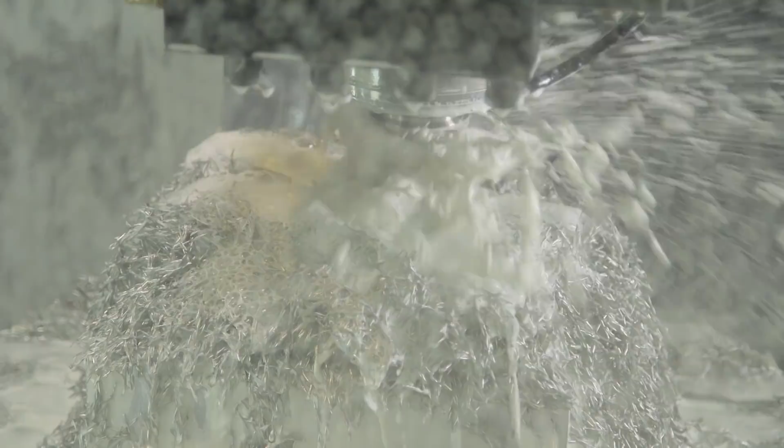Build my own company just like how Titan has. Teeth are cutting into the vertebrae. One mistake.

Our country was built on a foundation of American manufacturing.

I pledge allegiance to the flag of the United States of America. But today, we've seen millions of jobs lost, and 100,000 manufacturing plants have been closed. And to the republic for which it stands. Join us as we take a stand for American manufacturing and fight to bring those jobs back home. One nation, one nation, one nation. Under God, under God, under God, indivisible, with liberty and justice for all.

This industry is hidden from the general public, locked behind closed doors. Today, all of that changes.

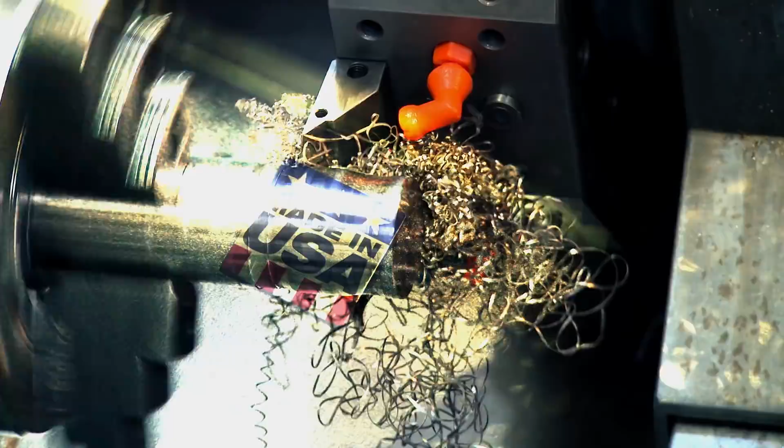Every week on Titan, we're going to show you great American companies that are manufacturing and doing it big right here in America. We're going to teach advanced manufacturing techniques, and we're going to clearly show you how to bring work back to our shores. It's time to put Americans back to work.

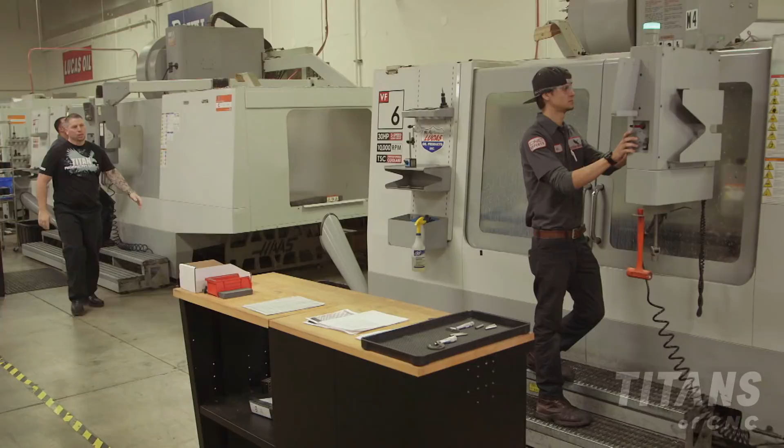All right, have a good weekend, huh? You too, buddy. All right, yeah. Stuart, have a good weekend, huh? Yeah, all right, take care.

What's up, guys? So, how's it going? So you're on the lathes now? Yeah, I do everything, dude—mills, lathes, make it happen. What about him, stepping up? A little confident, a little cocky, but he's doing good. Keep it up, man. Have a good weekend, huh? Yeah, you too, okay.

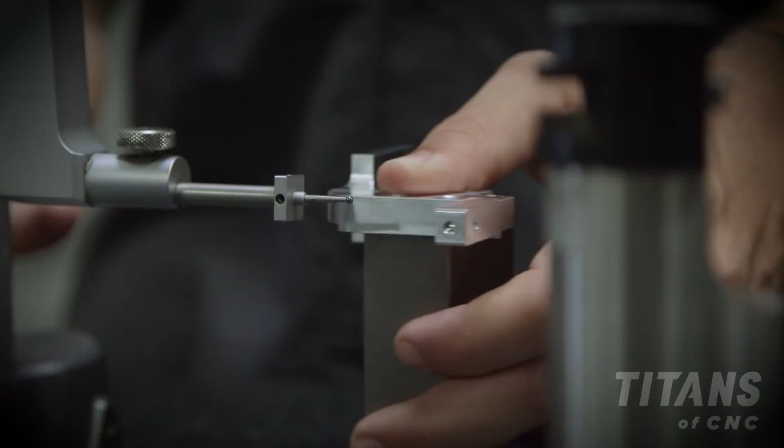As a father, I love just seeing my kids working, like it's a family business. I look around this shop and I'm just like, we got all these machines, look at this big building. But without family, it doesn't mean anything.

When I first went to prison, my son Chris was just born, Tyson was 3 years old. I'd ruined everything and there was no hope. I had 16 years in prison, and I was like, I'm never gonna see my kids again, ever.

I grew up in Maui, Hawaii—it was me, my brother, and my mom. It was pretty hard, you know, I didn't really see my dad too much. He was in prison right when I was born. We would talk on the phone here and there and see him sometimes, but it's hard growing up without your father. I tried to do something that would bring money into my family so I could take care of my kids, so I could bring them to live with me.

Walked into a machine shop, got a job for $9 an hour. Everybody knows the story, I worked my way up. I moved in when I was 16, and it was pretty hard, because I had my own habits and stuff, and 16 years of not having that is going to create conflicts and struggles. Me and Chris, we're like the same person—I look at him, it's almost like looking at a mirror, you know, when I was younger.

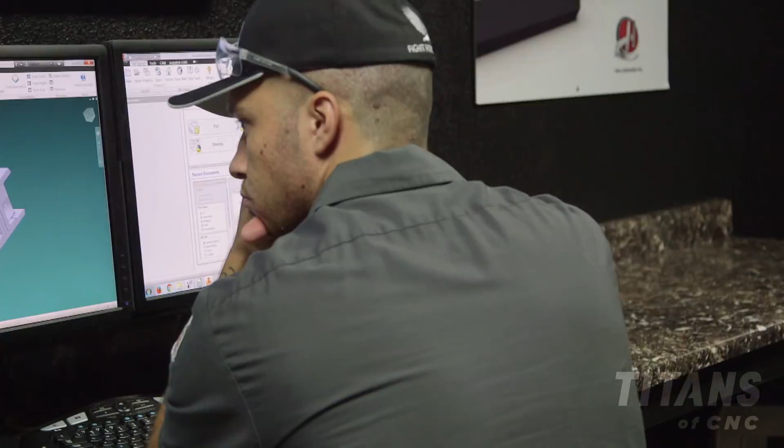Hey, what's up, Chris? How are you? I thought you went home, man. Nah, I just stayed here doing the work. So you're off the clock, just doing it on your own? Yeah, just trying to perfect it, get good at it. I'm really proud of you, ever since you came back you've just been doing so good, man. It's great having you.

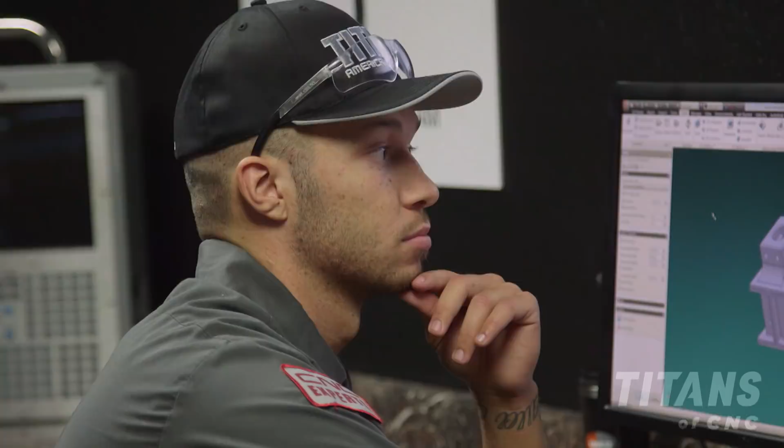Yeah, hanging out, barbecuing away from work, and then just seeing what you're doing. I want some titanium jobs, some Inconel, anything crazy like that. I want that. You're ready, you know? Yeah, I'm confident. Cool, ready to do it. Opportunity's coming. Yeah, let's do it.

Well, I'm getting ready to take off. You want to go grab a bite? Yeah, for sure, I'm done. I'll just close this up and I'll head out. Okay, cool, I'll meet you out there. All right, cool, yeah.

Programming has become like this kind of bond between us now, and we talk about it all the time. I'll be at his house, we'll be talking about speeds and feeds and improving stuff and taking it to the next level. It's just this thing we're both real passionate about, so it's cool we have it in common and can talk about it anytime now.

Awesome, everything's turned off? Yeah, everything's good. Cool. You know I'm mastering this HSM Autodesk software, right? You're getting pretty good, man. It's time for a raise, dude. Not that good, I think I got to teach you a few more things.

Next on Titan: a big chunk of titanium, running over 100 inches a minute. Built my own company, just like how Titan has.

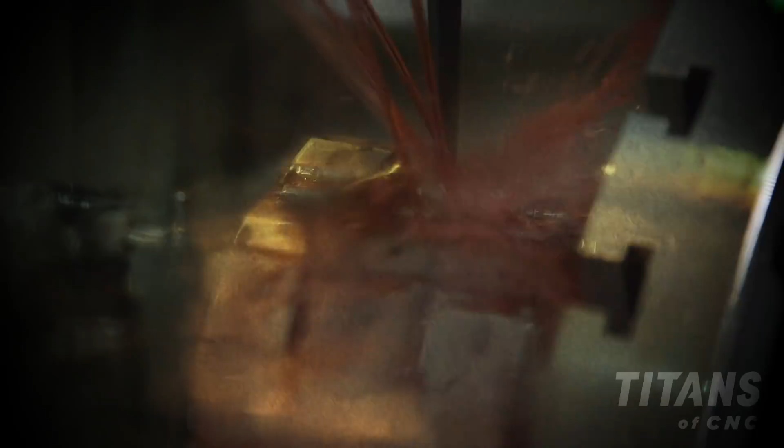So you guys are making parts that go inside the human body, hooking our bones together, and then you're also making parts that are going into space, right there in Pennsylvania?

Yeah, it'll be great to have you. We have everything lined up for you, ready to show you what MK Precision can do.

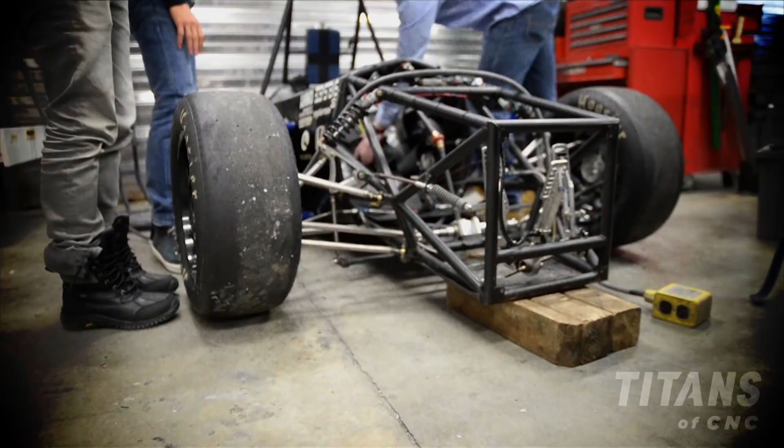I know it's only a week away, but we have a special project for you. I have a collaboration going with Villanova University, and the students are building an SAE race car to compete against well over 100 teams all over the world. It's a titanium upright, all four corners of the car, and it ties all the suspension together. It's a critical component, and that's why they picked us to make the parts. But I know you can knock them out just like I can, I just don't have the time.

All right, so go ahead and send the solid model over to Zach. We'll check it out and get right back to you. In a week, I'm coming to Pennsylvania, MK Precision. It's gonna be awesome. All right man, we're excited to have you. All right man, I'll see you later. Say hi to your brother. Will do. Good to see you, Zach. Yeah, good to meet you.

I just got off a video conference call with Mike from MK Precision, and he didn't throw a wrench into my work week, he drove a car right through it. He came with a challenge to build a titanium suspension upright for the young engineers at Villanova University. He knew I was coming out, and now he wants me to bring this part.

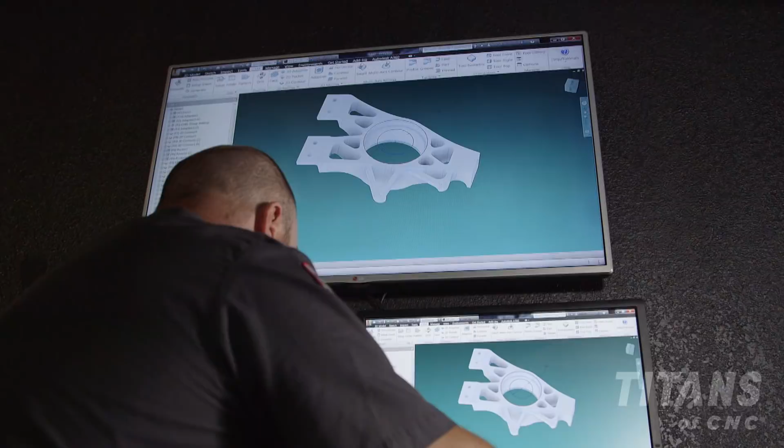I went in and talked to my team, talked to Dana, and of course he was giving me some attitude, but I gave him an attitude adjustment and solved that problem. I gave him my son Chris, I gave him Stuart, took him off the machine, told him to get on the software to start programming the job. I ordered the material from TMS Titanium, it's getting here first thing in the morning. We're all set to go. My other guys have come in line to take care of my other customers, and we're rolling.

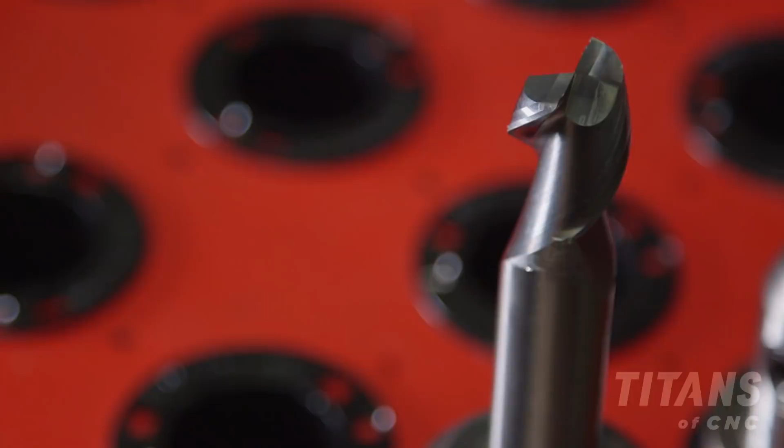Right now, Dana has me doing a setup on the 5-axis. Currently I'm grabbing tools for him. You might not think selecting tools is that big of a deal, but the slightest variance or a small chip in the tool can be the difference between succeeding and failing. There's a million different tools, and as a machinist you have to master all of them. Just looking at the IMCO end mills, you have 2 flute, 3, 4, 5, 6, 7, 9, 13 flute - those are the different cutting surfaces, and each design has a different purpose. Then you've got to look at what the end mills are made of, the different coatings, the different lengths. When cutting titanium and Inconel, you have to master it all to be efficient.

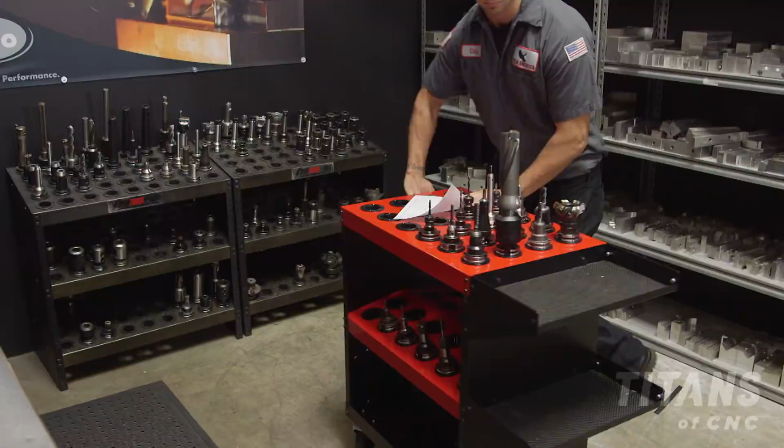Just got done programming this big chunk of titanium for MK Precision using Autodesk Inventor HSM. It's an upright for a little race car for these college kids. Gonna start out with facing this thing - this is a big chunk of titanium. It's gonna be a lot of roughing using IMCO end mills, running over 100 inches a minute. They're gonna be tearing it up.

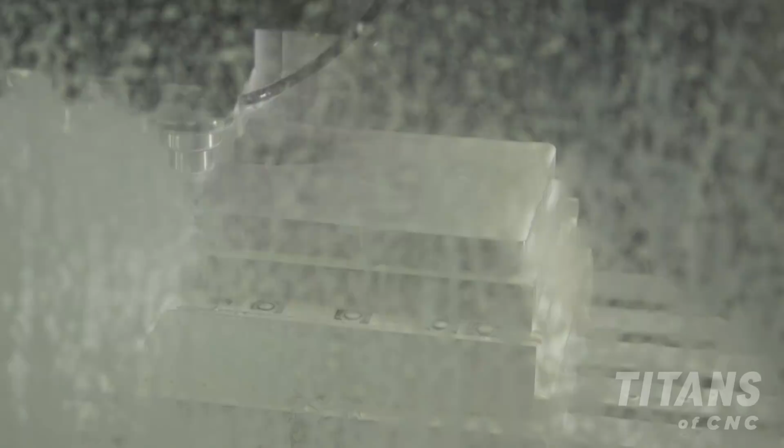Right now I'm finishing the body of the part, getting rid of all the material around it. I'm running heavy coolant on this - titanium can ignite, and at the speeds and feeds I'm running, I can't take any chances trying to run dry for the show or anything. So I'm gonna be blasting coolant on those tools, making sure they last. If I were using Cobalt standard drills, I'd be pecking, taking a chance of breaking drills and putting the entire process in jeopardy. There's a center bore that's got to be held real tight for the fixture on the second side that Titan designed.

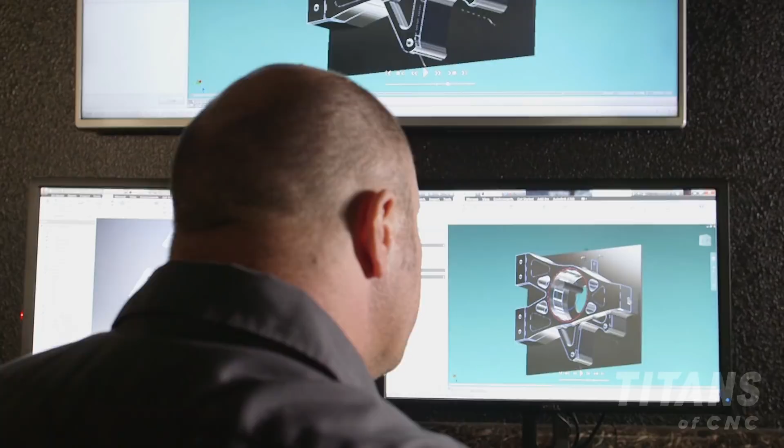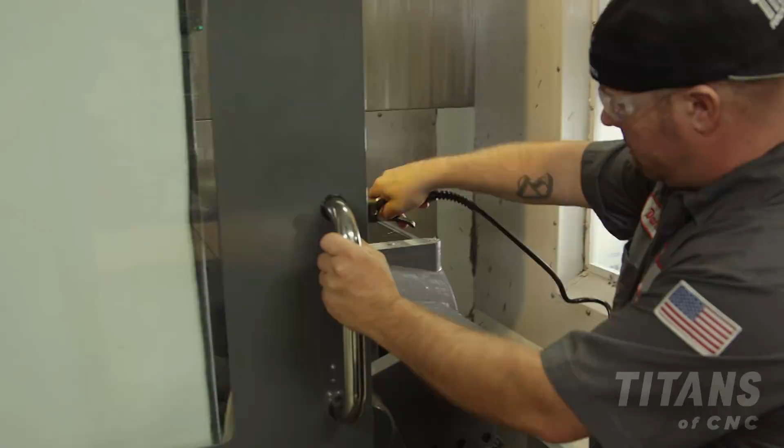There's also some pockets on the part. Because of how deep they are, you've got to use smaller end mills. When doing a part like this, you've got to have a good strategy. Our strategy is to go nice and deep, take a lighter cut radially, and just jam through it. These are the type of strategies you need to implement to be able to compete in manufacturing. There's a lot of shops out there that aren't using the latest technology - this op would be taking all day for them. This is what you have to do to be competitive in America.

What's up, Sean? Hey, Dana. Got the suspension upright for MK Precision.

It's a cool part. A lot of the dimensions aren't on the print, so I want to make you a print off the CAD model, and then you can check this out. All right, I'll meet you there in a couple minutes.

Dana just brought me this part, which I know next to nothing about, except that it's a huge chunk of titanium, and it's gonna end up on a race car.

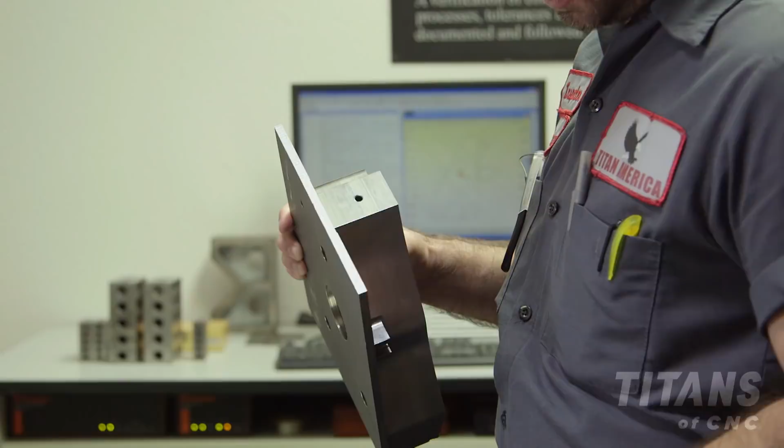It seems like a moderately complex part, but to make things more interesting, I received a minimum dimension drawing. So I ran to the programming room and got some supplemental data off of the CAD model, which I'm now using to form my cogent and very comprehensive dimensional analysis.

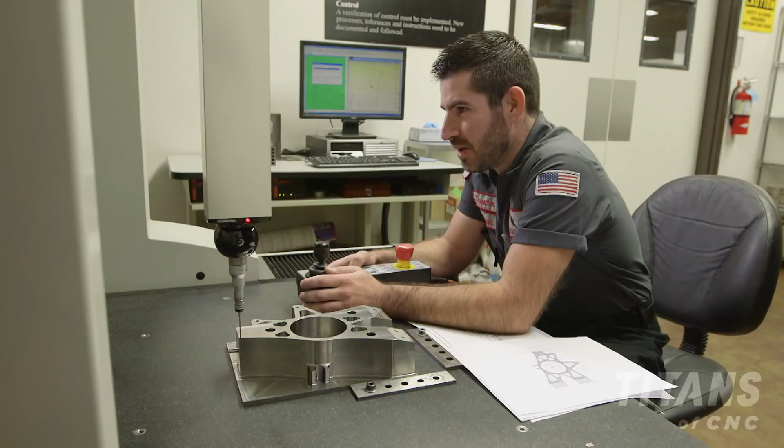It's pretty simple stuff, really. All I have to do is check lengths, widths, heights, hole sizes, locations, depths, profile, perpendicularity, roundness, flatness, internal and external radii, and all my edge breaks.

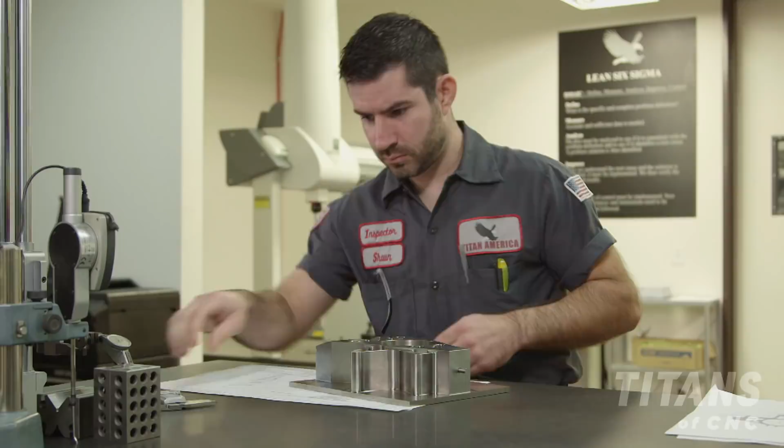Once I'm confident that all of the physical elements are in their proper places, I'll take the part over and run some gauge pins through the holes to double check the size. I'll perform a visual examination looking for dings, dents, scratches, bad blends, and unwanted tool marks.

Once I'm satisfied, I'll take the part back out to Dana and give him the green light to go ahead with production.

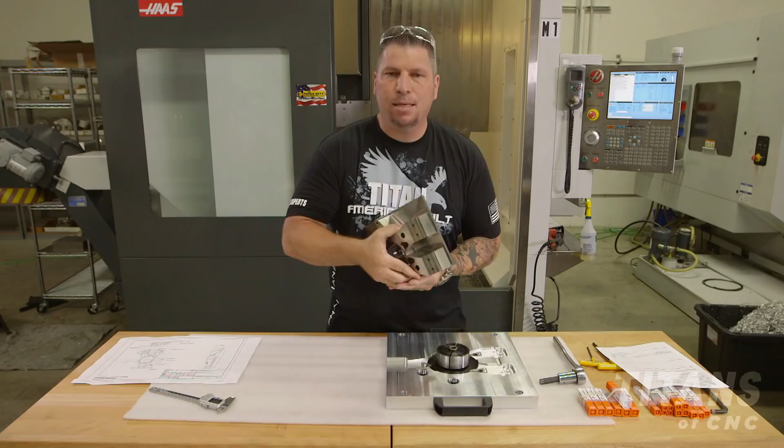So the first operation on this titanium suspension upright is complete. Dana did a great job removing all the material. The surface finishes are absolutely beautiful. And now we gotta flip it over and 3D contour surface the entire part.

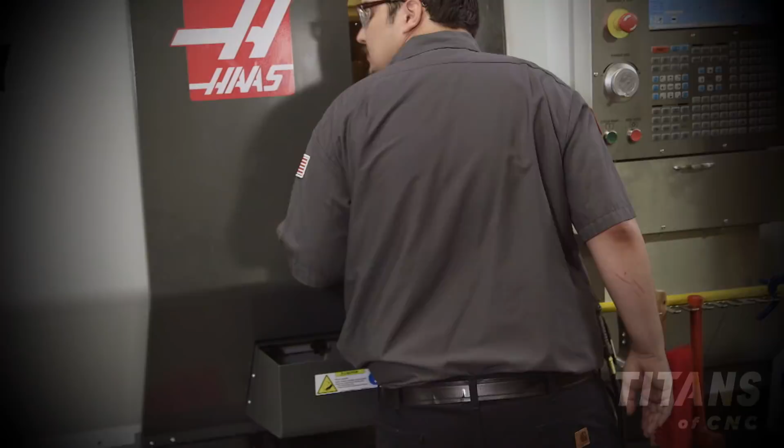Then we're gonna take it down to the lathe department, and Tyson will pop in a few O-ring grooves, completing the part. So today, I'm gonna show you a cool technique.

I got some partners, and they are awesome. There's a company called Mitee-Bite, and these guys create clamps. Special clamps, machinable clamps, that clamp onto odd surfaces. This part has an odd shape.

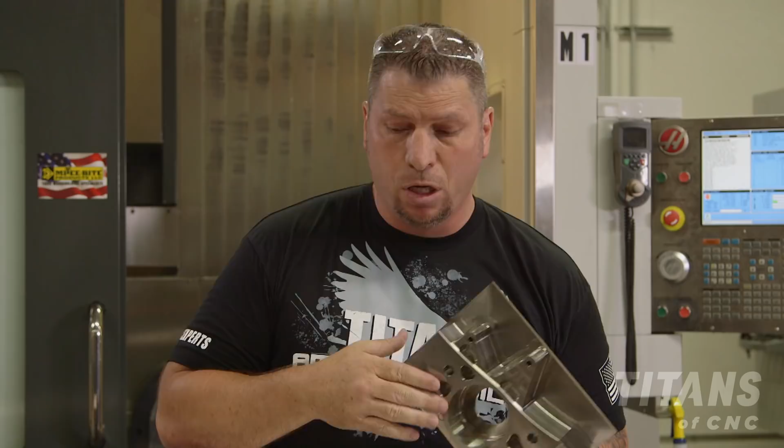So what we did is we went to the Mighty Bite quick change pallet system. Here's the pallet that we made. This guy right here is a Mighty Bite ID expansion clamp. It's gonna expand inside this diameter, locking it in place.

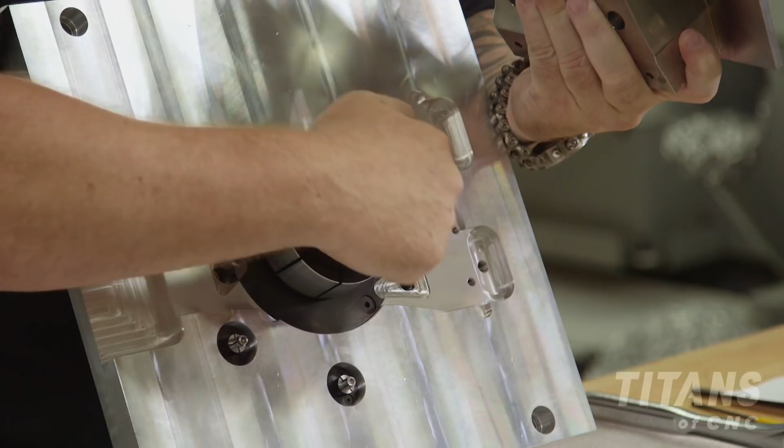So basically we're taking this guy right here and we're dropping it down. In machining this plate, we machine the profile of the part within a thousandth, so we can lock the part right down inside and it can't move. It's low enough so no tools are gonna hit it, and it's gonna keep everything perfect.

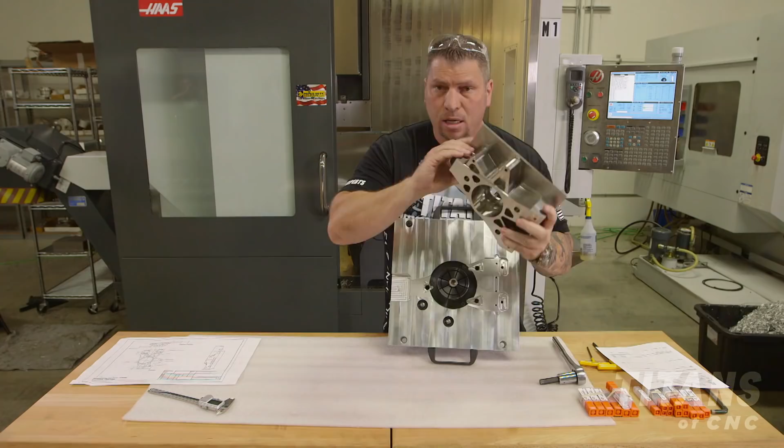This bad boy right here drops down. It's gonna wiggle right inside. The expansion clamp expands, so as it goes in, it forces it out. So I grab this guy right here. Boom. That's it. Thousands of pounds of force.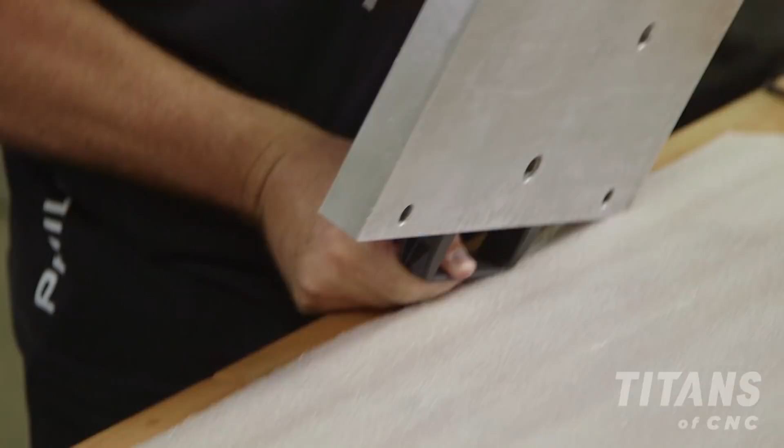Grab these little guys, two expansion clamps right here. Drop this guy in. Done. This guy in over here. Turn it. Boom. We're ready to go. I got these handles right here. No matter what you do, that part cannot come out of here.

So we're locking this plate right here, right over the four pins. Drops down, already solid. We got the two diamond precision pins that come up and orientate this plate perfectly with intent. Now I grab my T-handle right here, my hex wrench. Go ahead and tighten this bad boy down.

These pins also, as I tighten them, they're expanding inside. So since the entire plate is precision cut, and each diameter is precision, as it expands, it just locks it in place. There's nowhere it can go. That's it. It's 100% rigid, ready to go. We're ready to cut some titanium. Boom.

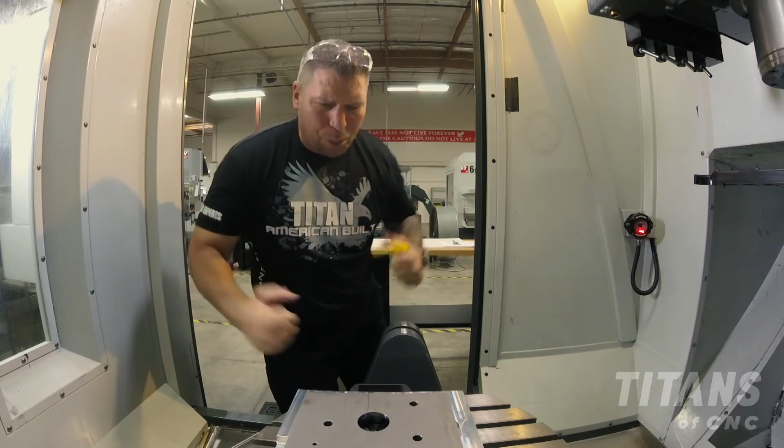Next on Titan. Is it beautiful? Dead nuts. Titanium products that go into the human body. One mistake...

Everything is going really good with the suspension upright. But before we start the second operation, I want to take you guys on a journey over to Virginia, where we recently visited Danville Community College and the Gene Haas Center for Integrated Machining. They're bringing individuals into the college to teach them manufacturing, and they're bringing up a young workforce, doing it right at Danville Community College.

Check it out. Hey, Troy, very nice to meet you. Yes, sir. Welcome to Danville Community College. Oh, thanks for having me. Advanced CNC Machining right here in Virginia, making it happen. I love it.

Manufacturing literally saved my life. I think when I was 14, I'd already been arrested 21 times. When I was 22 years old, I was not only serving a 16-year prison sentence, I was doing 6 months in solitary confinement. I had lost my way in life. I got out of prison early, and one day, I just had enough.

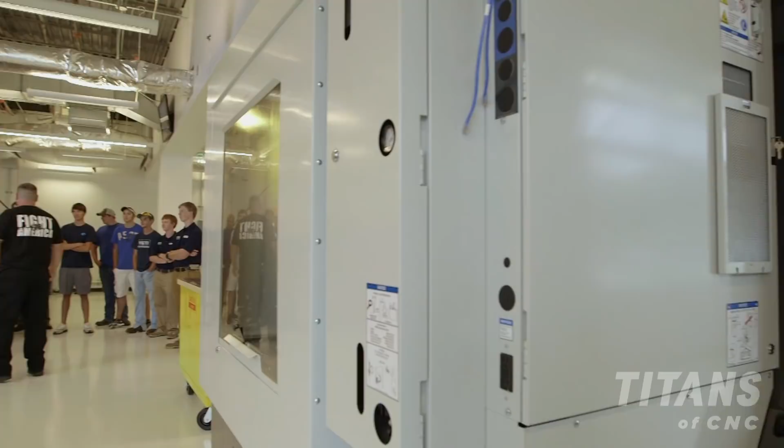This is a community where you actually lost 15,000 manufacturing employees? Yeah, our community is very rich and steeped in manufacturing, but it was a different type of manufacturing. Over the years, we've been one of the world's largest producers of textiles. We had 12,000 employees in Dan River Mills, and that industry no longer exists. So we've put these programs in place to retool America. What we mean by retool America is give our young people the tools they need to manufacture something different.

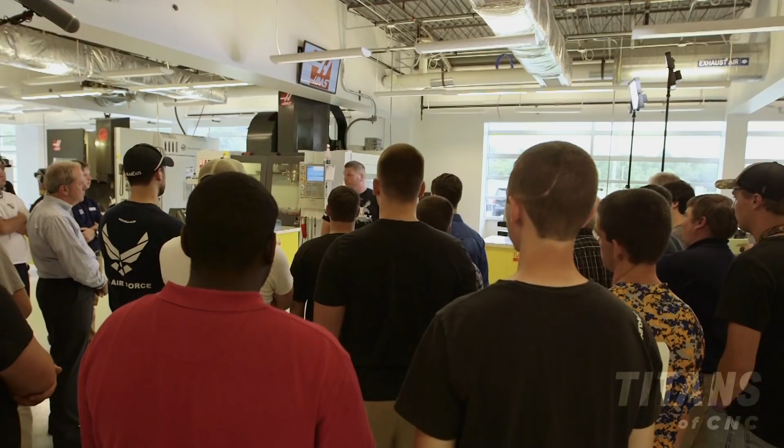Sometimes opportunities come in the weirdest places. I looked in a paper and I saw saw operator. I had no idea what a machine shop was though. And they had these CNC machines. When I stood in front of it and I opened the doors and I looked at the numerical control, I just got it. And I loved being there.

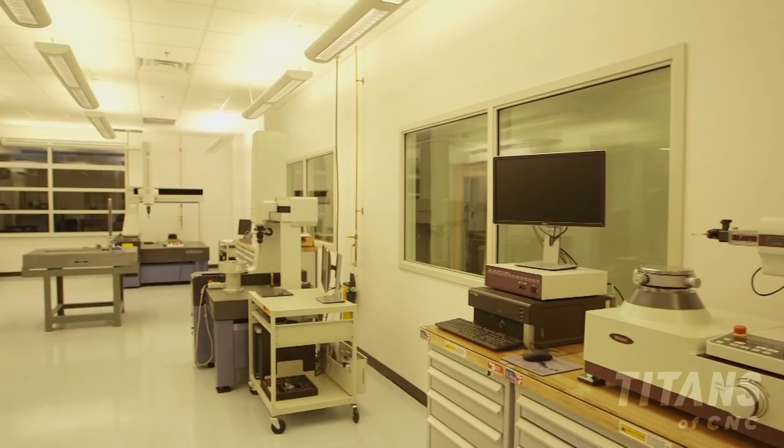These students walk into this space and they can see the relevancy of it. They see modern technology, vibrant space, and they know instinctively that there's a future for them. What you guys are doing here, training our workforce, training the younger generation, bringing them up with the new technology, new skills. You guys are leading the way so we can keep those jobs here.

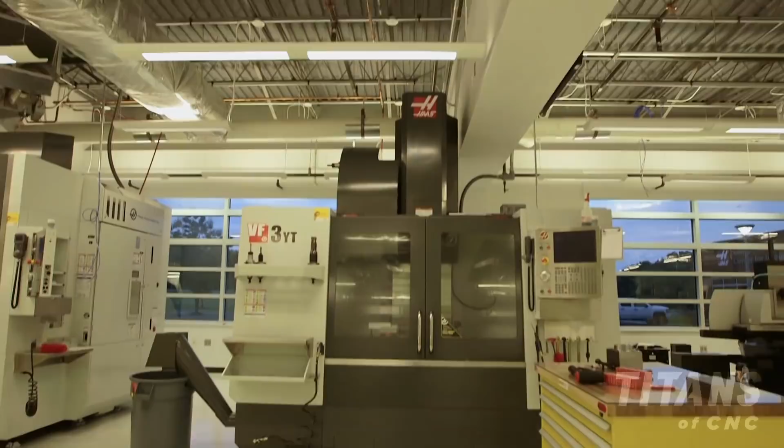Big companies need a profit. And if they can't get their profit right here, they believe, they're programmed to think they have to go overseas. Most machine shops are only running at 20 or 30% of their capability. So if we can take it from 20 to 30% and take it up to 60, 70%, you're gonna bring all that work back. That's the message that we want to get out.

Manufacturing factories of today and tomorrow, this is it right here. These students actually can see taking those 3D models and turning those into complex shapes and hardware that they can hold in their hands, and see that the creativity they have can turn into something they can hold.

I think that's what's so exciting, and what our students are so excited about, being a part of this first class here at the Gene Haas Center.

Recently, I've been able to take all the skills I've learned here at Danville Community College, put them together, and compete in the Skills USA Nationals, and placed 4th place in CNC turning. And once I get out of school, I'm wanting to be able to build my own company just like how Titan has. So this is a real-world manufacturing plant, but it's an educational institution.

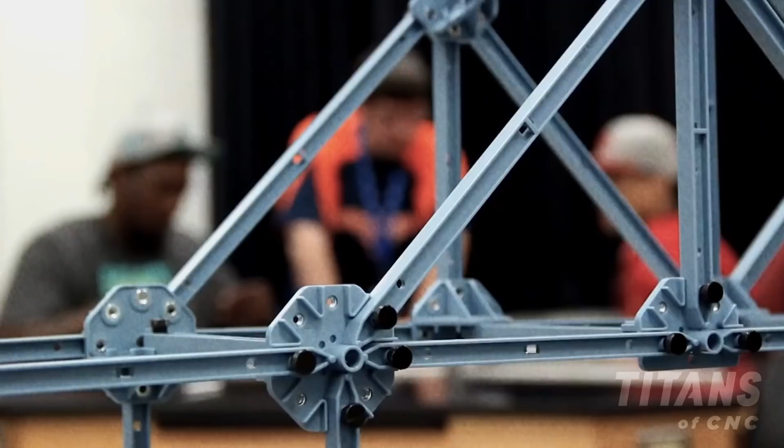They're in school, they're learning technology, and you keep giving them those problems to solve. It helps them gain confidence, not only here, but on the outside. And that's what happens in the real world. When they're working for somebody else, they have to solve problems, they gotta fix things, they gotta make it happen.

There is nothing I do more than make sure my quality is perfect. We're inspecting every 5th part, every 10th part. We're visually looking at every single part. If we're dealing with tenths, we're inspecting 100%, even though it's not called out. If you inspect your parts, you're not gonna have garbage. It's as simple as that.

It's amazing what some of these bright minds, the ideas that they have. I think it is a new model in training. I think it takes training to a whole new level in the world of CNC manufacturing training. And I think that it's going to make us very competitive here.

I mean, this place is immaculate. It's beautiful. I love it. It's high tech. It's awesome.

If somebody says you can't do something, take an honest look at it, and if you believe and know that it is possible, go after it, man, because we're all built different. We have different gifts. Go after it. And understand that there's a process and it takes time.

If we're gonna step into a manufacturing facility, let's be exceptional. The secret is solving people's problems, finding a niche, and taking your quality to the highest level at an affordable price. That's the secret. Thank you guys, appreciate it. Boom.

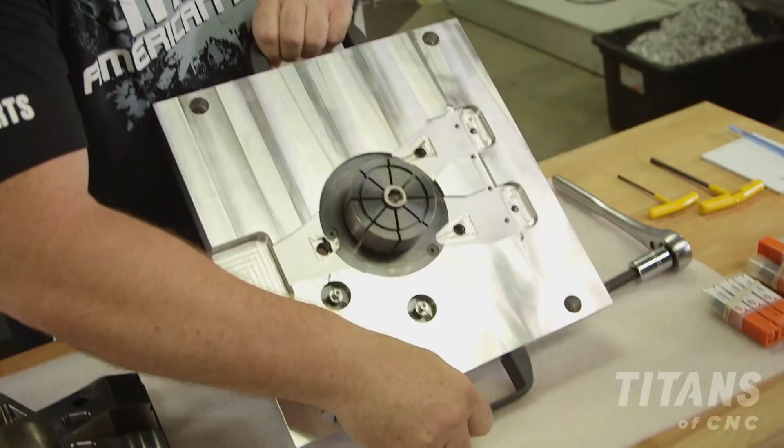In Danville, Virginia, American built. That's it, it's 100% rigid, ready to go. We're ready to cut some titanium. The first operation is done, and now we've flipped it over and put it into our amazing fixture plate. It's solid, it's rigid, and we're ready to go.

So on the first op, we profiled around it. We did the major bore, did a few holes, did a few things. Now we're flipping it around. We have the material that we held on to, we call that the hat. This is a thick piece of titanium that's hanging on the outside. So what I'm gonna do is use an end mill, and I'm just gonna take a nice fast cut going all the way around it, coming from the outside in, so it never gets weak. It just strengthens as you get to the core of the part.

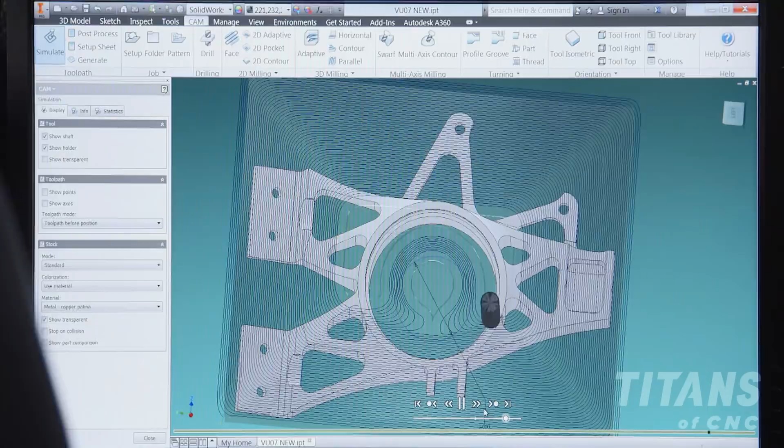One of my favorite parts about the Autodesk Inventor software is adaptive clearing. The software already knows what material is there and what's been taken away. So I'm using the adaptive clearing on the second side with an IMCO half-inch end mill, and it's roughing all the material so it's nice and tight to the solid model. As you can see right now with the tool paths, it's just going and it's hogging everything out. I've told the Autodesk software to stay 30 thousandths off the surface of the part during this roughing cycle.

That gives me a nice amount of stock to come back and use my finishing ball end mill to clean the whole part up. So now that I did all the adaptive, I'm gonna come over here and clean up these surfaces. See the material getting cut away? Just wrapping it back, taking another cut. I'm just cleaning those surfaces right there.

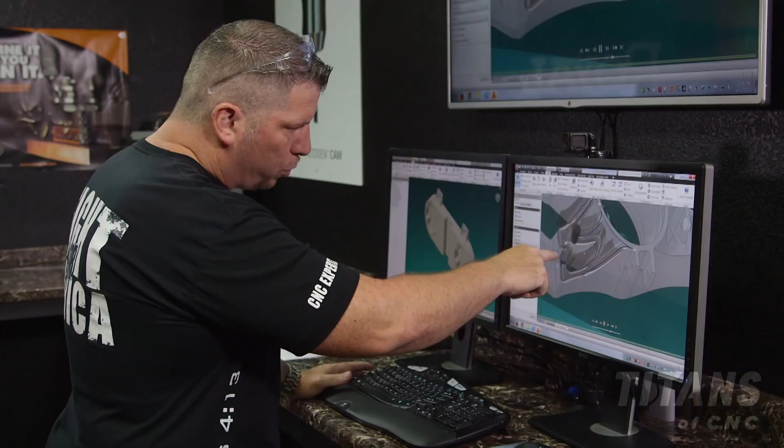Now we're gonna finish machine the 3D surfaces. You can see the tool making the cuts all the way around it, and it's just working itself in. When you get close, you can see each cut. Boom, boom, boom, boom, boom.

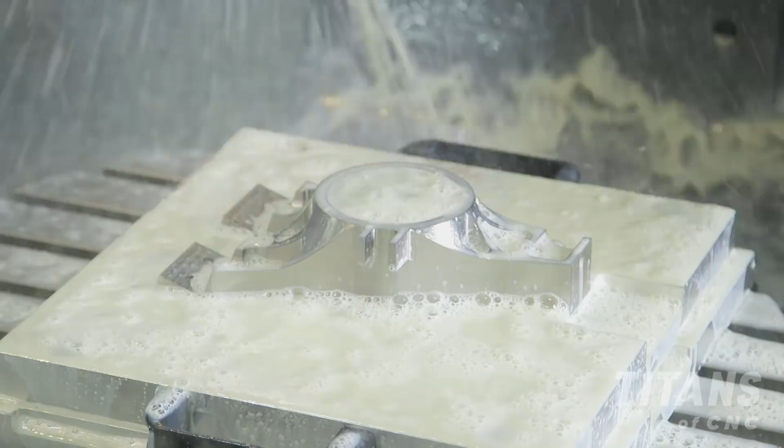We're doing the last 3D surface. 5 thou step over, running hard and fast in titanium. Once this is done, the part will be complete. We're gonna take it out of the machine.

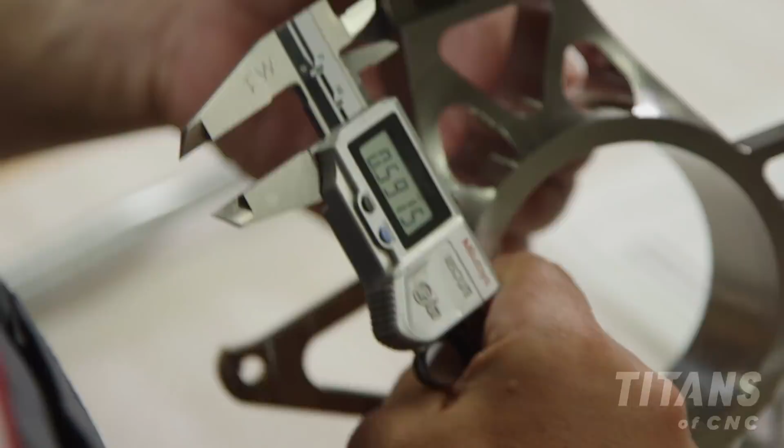It's for the young engineers at Villanova University in Pennsylvania. It's gonna be like... ah. And they're gonna assemble it, they're gonna race their car, they're gonna win. Boom, that's what America is about.

What's up, man? Is it beautiful? Dead nuts. Dead nuts? Perfect. Ooh, I love it, man. Let's get it in the shot. Let me know what he says, all right?

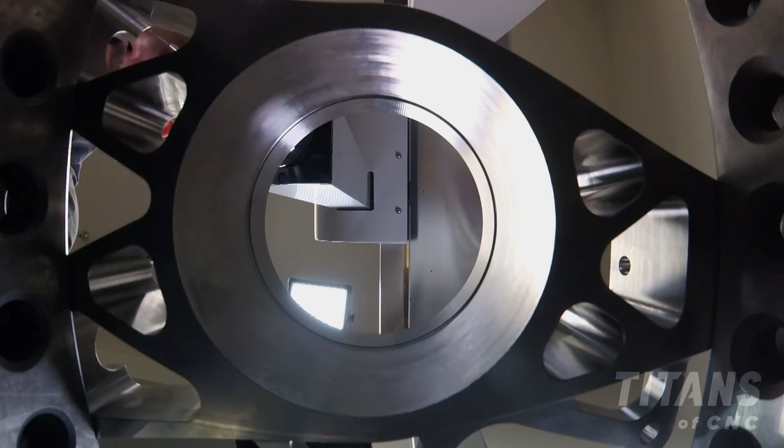Thanks, man. Dana just finished the second operation on this suspension upright for Villanova University. I'm having him take it into Sean for inspection. Sean's gonna check it out with the CMM now that the part is almost complete, make sure everything's perfect. Once he gives me the okay, once he says it's dialed, I'm gonna take it over to my son Tyson, and Tyson's gonna finish it off.

Tyson! Hey, how are you, man? I'm doing all right. You almost got those jaws cut? Yep, they're almost done. Tyson has the pressure now because it's at the end of the day, he's doing the last machining operation, and if he makes one mistake, it could scrap the entire project. No matter what, tomorrow I'm flying out to Philadelphia and I need to have this part.

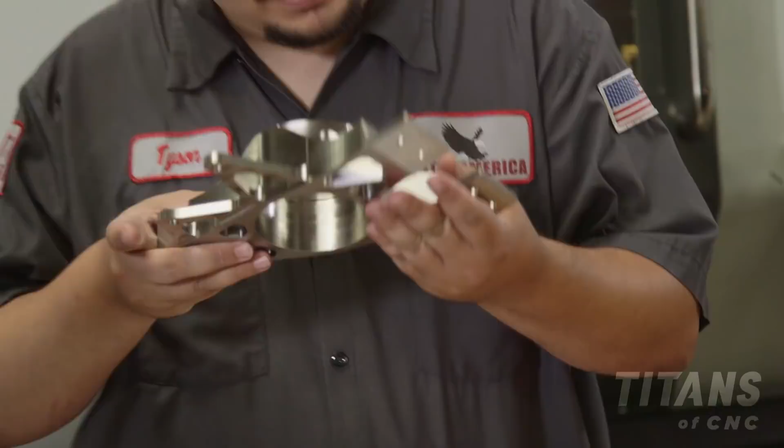I think you can get that tolerance. CNC machining, baby. Are we good? Yeah. All right, thanks, huh? Yep, get this done. Let me know.

Got this crazy looking part from my dad. Not doing too much, I'm just putting some O-ring grooves, and I've got a super tight diameter over here, but it'll be a piece of cake. Just gotta get these done as soon as possible. It's going on a plane to Pennsylvania.

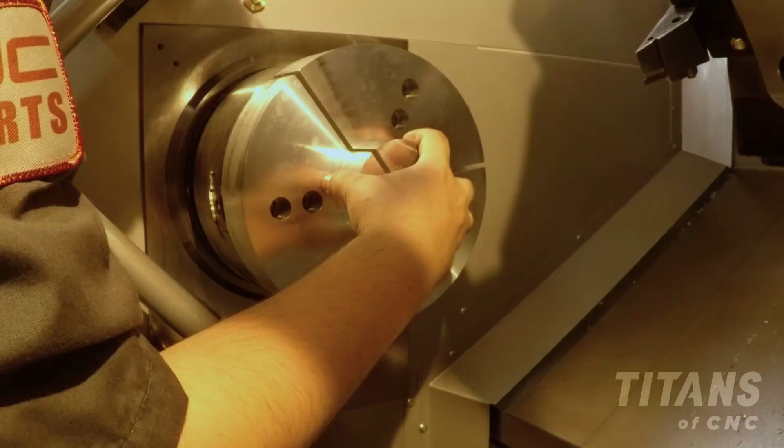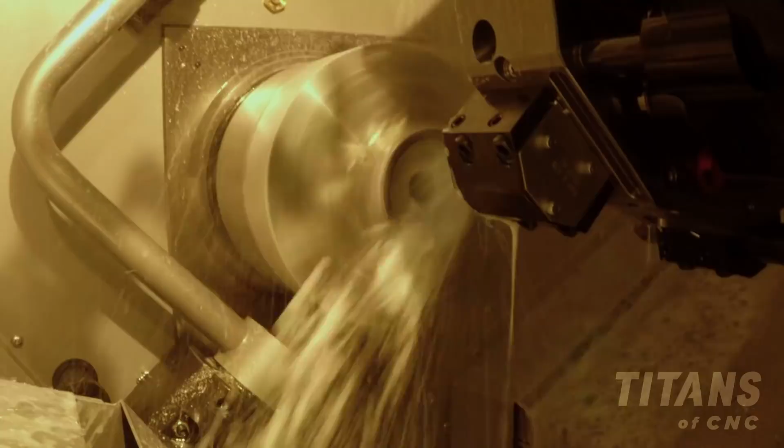I made some soft pie jaws. I'm gonna hold on to this ID right here. It'll be no problem to hold all these tight diameters I've got on this side. As soon as I'm done with this side, I'm gonna flip it around. I'm gonna hold the ID from this side, and I'm gonna do the exact same thing. The program is the same on both sides. It's 6AL4V titanium, a very hard material, very tough, but I'm gonna make it perfect.

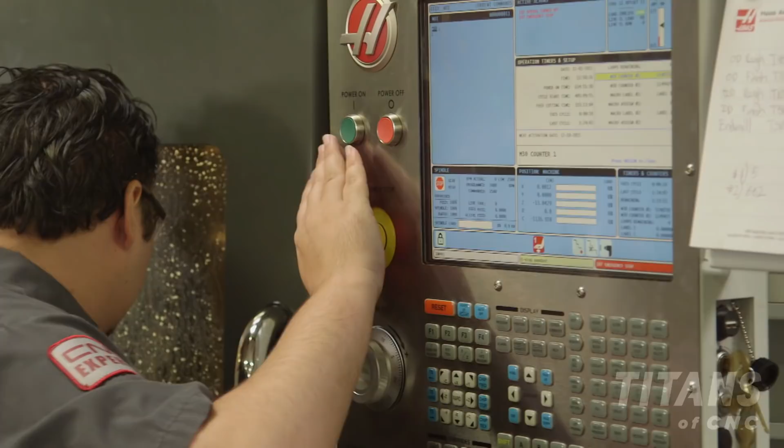Oh man, one of your cameras fell. You guys gotta be careful. Sorry man, we don't have time for this. Yeah, luckily everything's fine, but you gave me a heart attack. You gotta be careful.

Find where I was in the program again.

So Tyson did an absolutely amazing job on the last operation. Sean checked the parts out, made sure everything was absolutely dialed. Shaney packaged them up, and I am on my way.

All right, we're back on the East Coast. It's a rainy day, and we are in Warminster, Pennsylvania. We're going to MK Precision. These guys are awesome, they got a great attitude. They got like 40 CNC machines. They make crazy medical parts. It's an incredible manufacturing story. So let's get in here and check it out. It's going to be epic.

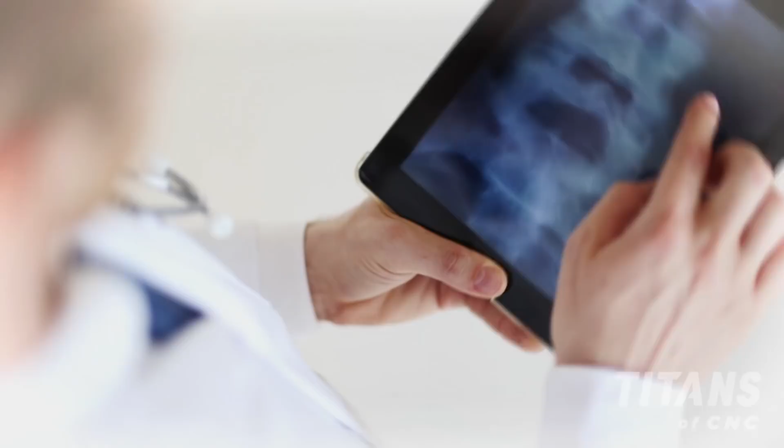You're very welcome. I started my career in machining tech school. So while I was going to high school, I'd split the day, half tech school, half high school. While I was developing my career, I was diagnosed with scoliosis, a curvature of your spine, and I needed spinal fusion to correct that. My spine was broken. It was fused with rods to keep the correction permanent. All the hardware that was in my body are the same parts we're making on our machines now.

Mike, hey, good to see you. Welcome to MK Precision. This is my brother Brian. Hey Brian, nice to meet you. So it's a family business? Absolutely, my dad's outside working on machines right now.

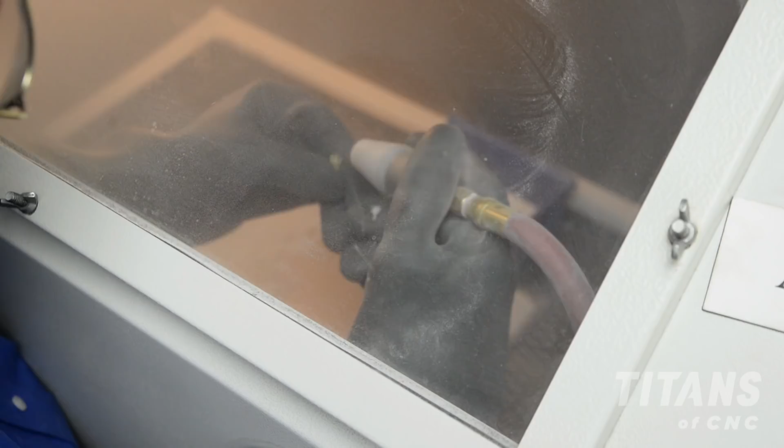That is awesome. MK Precision, you're making precision components out of titanium that actually go into your body. Sure, I've had parts myself, yeah. You guys are making it right here in Pennsylvania. Absolutely man. Boom! That is awesome. So, got that titanium part for you?

Excellent, we need that. The suspension Villanova upright needs it. Great, cool. These guys got a great program, and we really need the part, something they couldn't make in their own shop, so it's great to have you guys helping us out.

So they fabricate, they do all the carbon fiber, a little bit of racing, everything. Some of the advanced CNC machining, they don't have the capabilities in their facility to do, so that's why they called on us, and we were too busy with our shop making medical devices, so that's why they called you. So you guys are doing good job, saving lives, making it happen. Absolutely, well that's the least we can do.

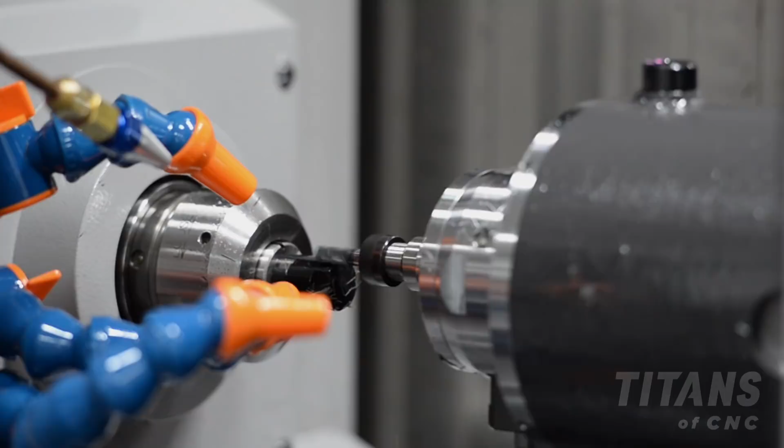And now I can't wait to show the viewers this incredible facility that you guys have. You guys got machines on this side, you got machines on this side. It's making it happen right here in Pennsylvania. Oh, let's go Titan, let's go show you around.

You want to be a success, you want to achieve, you do your best in bringing up your children. I have succeeded with all three, and when they ask me what do I want yet in life, I already have it all.

Hey Ryan, what's up? This is Titan. Oh Ryan, nice to meet you. Making it happen. Oh yeah, you know. This is the Villanova upright. Why don't you take it into quality, get it checked out for us? Yeah, I can do that. Thanks bud. No problem, man.

Machines just stacked in lines all the way down. Floor is clean, you can eat off it. I don't recommend it, but you can. We're medical, right? It's almost like a clean room. It's gotta be clean. MK Precision, I love that stamp of excellence. This whole shop has a stamp of excellence, American quality.

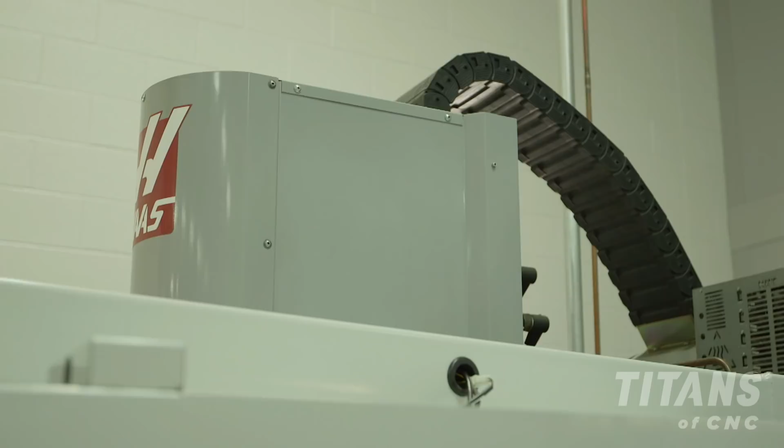So Mike, you were working at other machine shops. Right.

And then you just decided to go out on your own. How did it all happen? The only way to do it was to go all the way. Grab the machines, throw them in my dad's barn. I had to talk him into a loan. Every day I had a team of Clydesdales, and I used to have to go out and clean up. So Mike would come out and help me clean up the fields with the tractor and the shovel until I finally said yes. Had to hire my brother, train him up, took him from cheesesteaks to bone plates over 10 years. Wait, Philadelphia cheesesteaks, right? That's the only cheesesteak there is.

Essentially, I've always made stuff that went in the body in one form or another, and they're all American built. Being a mechanical guy myself, I talked Mike into going into trade school to get started, so I wanted him to kind of follow the same path. And that's how it all started. 10 years ago, we started the business in our barn. Here we are 10 years later with 40 machines.

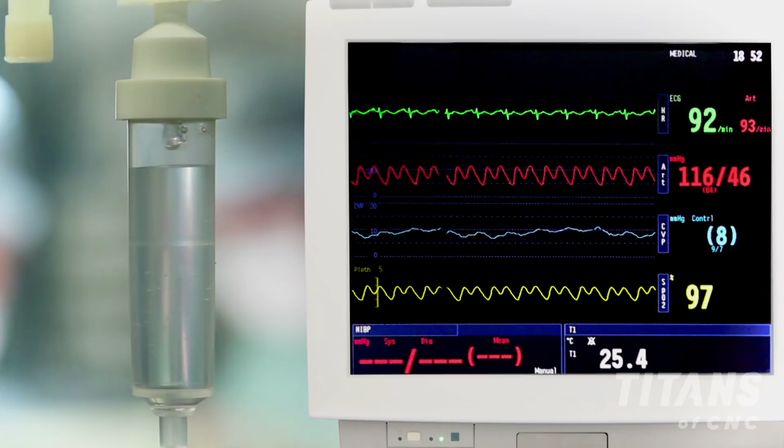You guys are making a great product, titanium products. Yep, they go into the human body. We know the pain that's caused without it, and we know what you need to go through to get it, and it adds a little bit of excellence to what we send out the door because we know what it does. So if you have heart issues or spine issues, or need implants, there's a good chance those titanium parts are being manufactured right here at MK Precision. One of our big OEMs is global, so we're worldwide. We have parts all over the place. So we make them right here in Pennsylvania, shipping them out worldwide. American quality.

Boom, boom. Yeah, I love it. Let's go look at a shop. Cool.

Automation doesn't mean less jobs. When you have the machines doing the work, you get the ability to bring more creativity in. Now we have the ability to have 40 machines with that same staff, because now we can have one guy running 3 or 4 different machines.

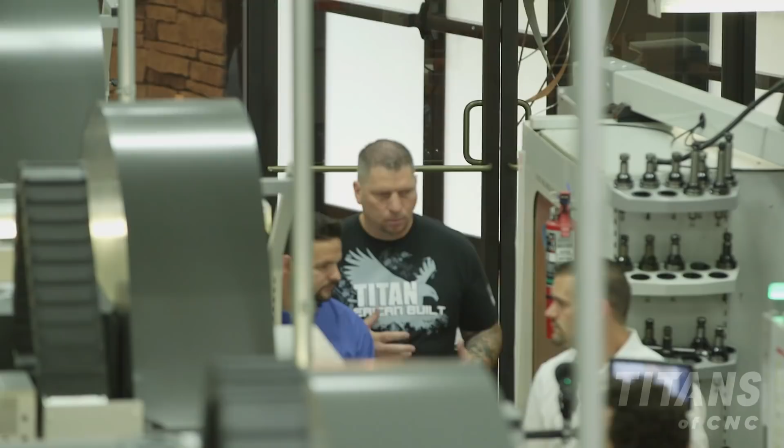It hones the workforce. So you guys have your raw material comes in, you cut it yourself, and then bring it out to the machines and just make it happen. We try to attack everything in a 5-axis mentality as much as possible, because we really try to optimize the operations. The more times you touch it, the more room there is for error. So if we have an option to do something in 5 axes, even if it's just a square with 4 holes in it, we set it up that way for the repeatability and how easy it is to manufacture — as much as you can get in one operation.

Manufacturing is a constant learning trend. The more you learn, the more you can adapt, the more you can add to your processes, the faster you can get your parts out, and the happier your customer is going to be with your company and the parts you're providing to them.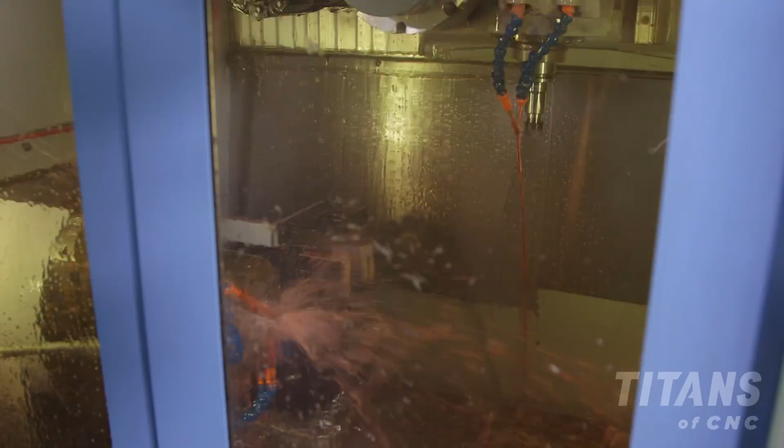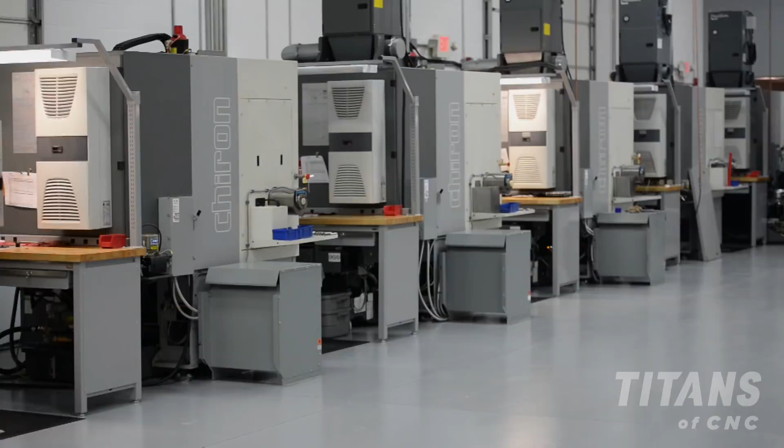So your parts are going global, right? You're shipping all over the world. To be competitive and keep your costs down, you guys are doing a lot of 5-axis work. We really tried to go after the swivel 5-axis bar-fed mills, for the simple fact that we can load an 1 5/8 bar, 3-foot length, and it will literally run for 48 hours unmanned. It runs its own tool break detection, so you don't even have to have an operator stand in front of it. It just runs non-stop, day in, day out — and it knows if it breaks the tool, it'll go grab another tool running in its place.

6Al4V titanium — aerospace grade, medical grade. What exactly is it? It's a disc replacement. So if you have a herniated, bulging, or degenerative disc, that would be removed and this would be placed in its position.

I see all these fine little detailed key cuts, dovetail cuts — what are the ribs for? When you expand the device open, those little teeth cut into the vertebrae they're touching to lock it in position so that it doesn't slip out.

So they're just teeth locking into your bone. Yep, holding it in place. Think of it like a knurl pattern.

Wow, absolutely love what you guys are doing there. Thanks, man, so do we. Doing it big. Thanks. Yes. Let's show you a few more things.

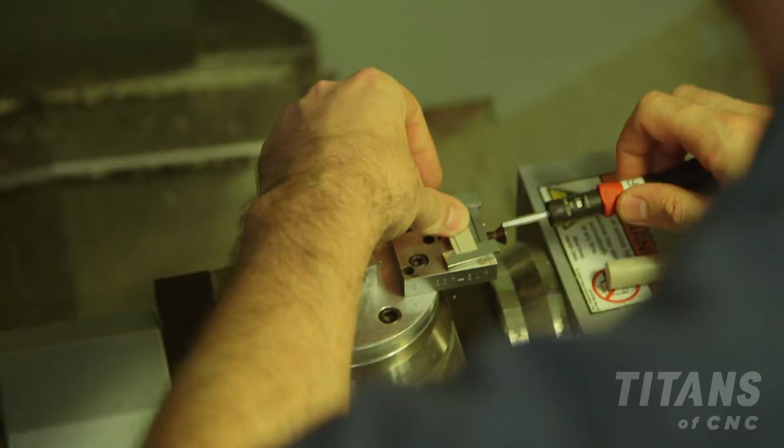Awesome, we really like to go after complicated parts to make. For anybody that thinks American manufacturing is dead, feel free to knock on our door and come in and take a tour. Titan, check this out.

So here's one of our many bone scrapers, right? This is a combination Swiss and 4th-axis mill part. The Swiss blank gives us this, then we fixture it into the Haas on a 4th axis, spin it around, get the profiles cut in, and get the sharp edge on that. Check that one out. That's what chisels the bone away. Ooh, it's almost eerie how sharp it is.

At MK Precision, we make the implant devices, but we also need to make the instruments to perform the surgery. So when a doctor needs to place that implant in position and there's bone in the way, you use a bone scraper. With a couple good raps on the end of it, you'll knock that bone out of position and let you slide the implant into position.

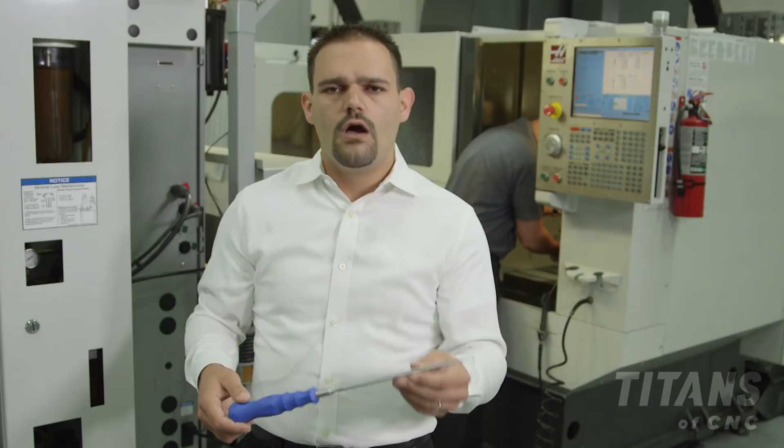You make all kinds of bone scrapers. Yep, a bunch of them. Much like the bone scraper, this is a curette. It's the same type of device, but for more delicate, detailed work down inside cavities, where you can feed it into a little pocket and pull a bit of bone out on the inside without having to use something as large as the other bone chisel.

American built, right here in Pennsylvania, MK Precision. Boom, started in a barn, now you're worldwide, making it happen. Woo, I love it, I love it.

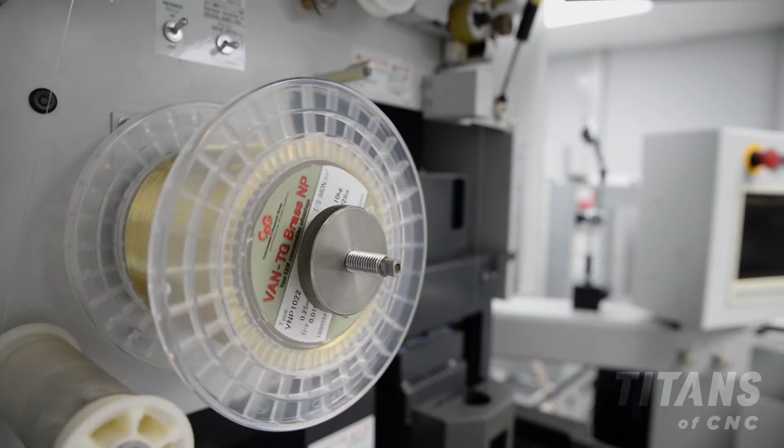What's that over there? Oh dude, let me show you. If you ask me how to stay competitive in an American manufacturing environment, I'd put it all in technology. You have to have the top tools in the shop, you have to have the fastest machines. Ho ho! UMC 750, I love it.

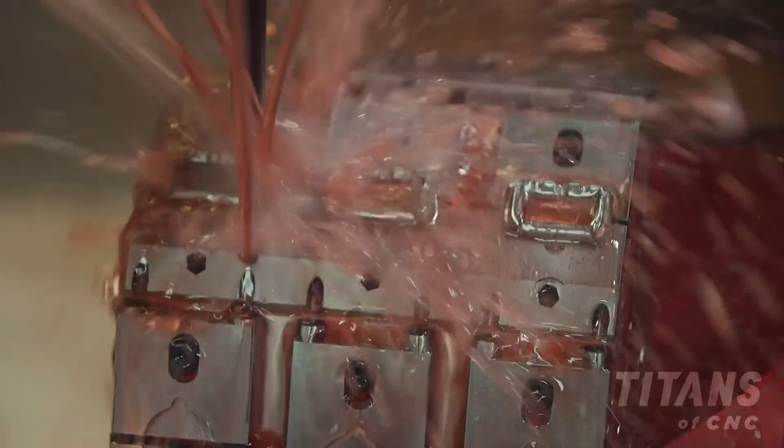All right Titan, so what we have here is our new Haas UMC 750 SS. We designed up this fixture in our CAD system. What we have now is an 8-sided fixture that holds 24 parts, 17 minutes apiece. You load it up first thing in the morning, run it, walk away, come back, it runs all day. Pull a piece off, put it through first article again, load 24 pieces back up.

As long as it's done by 4:30, hit the button before we leave, get another 8 hours, runs all night, load it two times. That's awesome. So the theory we've developed over the years here at MK Precision is long run times. Fixturing and multiple parts is definitely the way to go to stay on top of your game and keep everybody satisfied.

All right Titan, so this is our Swiss machining side, there's a dozen machines over here. This is our automatic cell, they run all day, all night. We try to work down to the smallest nominal number on your print to make the best quality parts in American manufacturing that we can, for your in-body implants to never fail and always work the way they're designed to work.

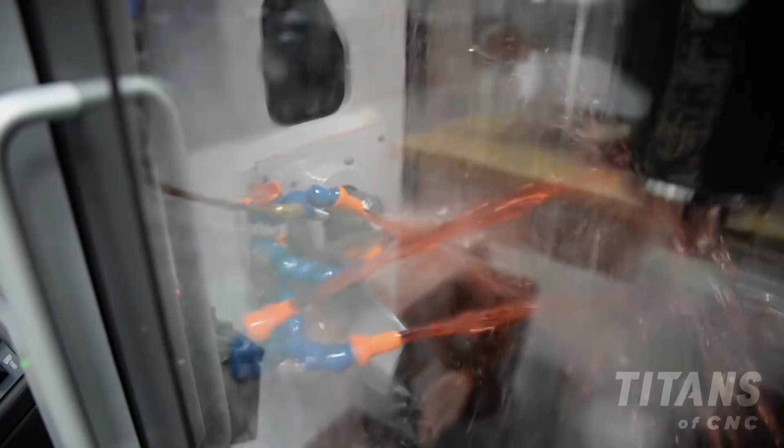Hey Titan, the Villanova engineers are ready for the titanium upright. Let's go see what it does. Awesome, let's go run it. Let's go, see how it goes.

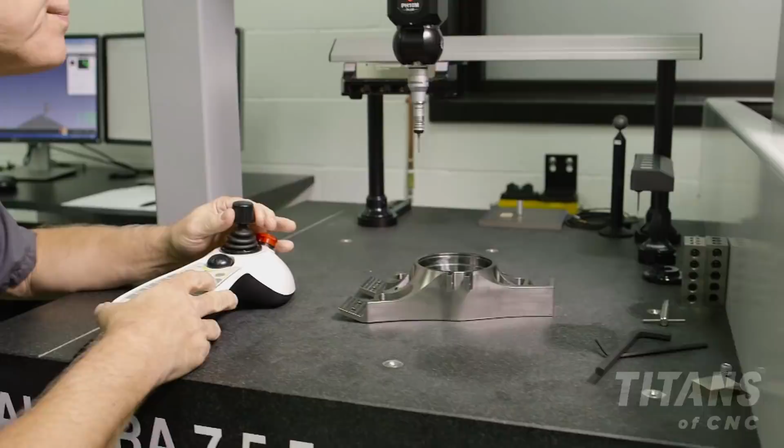We adopted the Villanova SAE racing team and their entire engineering department to build one of their new race cars for this year. Even though we're dead set on helping Villanova, there's times where business comes ahead of being able to help, so that's where I called on my buddy Titan to help me knock out these uprights, and I'm looking forward to getting it assembled and testing this thing out.

Titan, you're gonna love what these engineering students are doing. Let's go check it out. That's awesome, they are the future. Absolutely. Well, it is the moment of truth, we're gonna meet the students from Villanova University.

We got our suspension upright we made in California. We're gonna see if it fits. It's gonna be perfect.

Hey guys, looking good. Meet Titan. Oh, Villanova University in the house. Hi, nice to meet you. So you guys are engineering students at Villanova University, and you guys created this car right here? That's right, from the ground up. Yep, American manufacturing, basically happening right here in Pennsylvania.

And you guys are gonna race against like 150 schools worldwide. Yep, and this car is gonna dominate. You know it, with this crazy titanium part. It's gonna be perfect. You guys wanna assemble it? Let's do it. Our team has about 25 members.

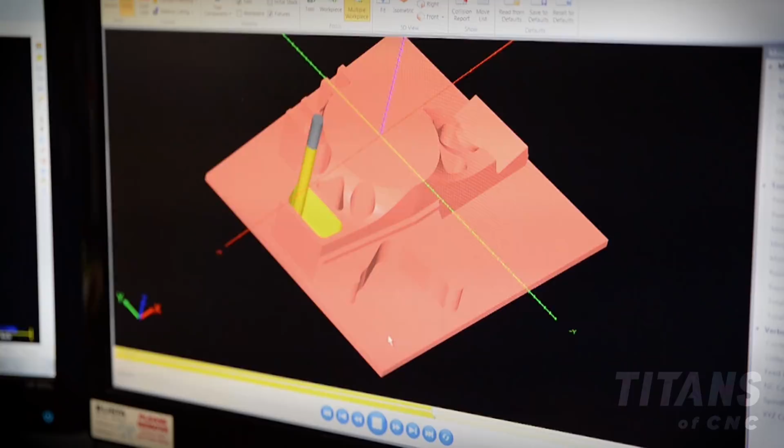We've been in existence for about 7 years or so. It's entirely student run, so all the research, all the design, all the manufacturing, all the corporate sponsorship, everything to the logistics to getting us to the competition is done by the students. This car is absolutely incredible. There's so much going on here.

So you guys designed it, fabricated it? Yeah, everything comes together from the chassis to suspension to driver control, steering. We first designed everything and then we manufacture it, so it's a whole different process, and here's our end goal basically. That's awesome. So you guys like cut the material, bent it, welded it, put it all together, everything.

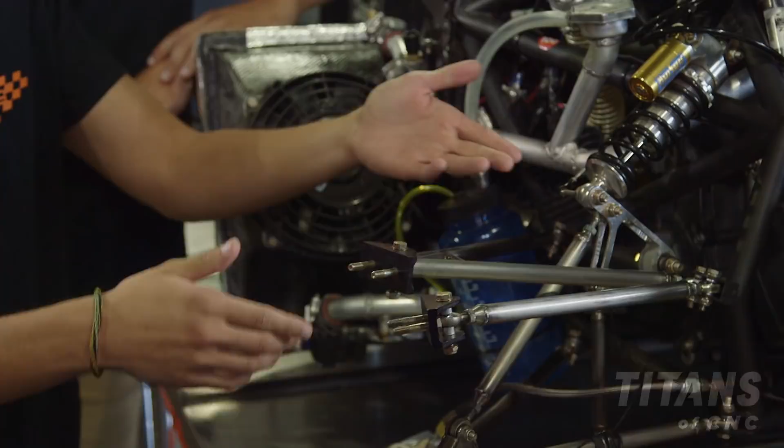So we start the design of the car with the suspension. We pick all the hard points and then we model the components themselves. Then we perform a basic analysis to see what the kinematic behavior and how that'll affect the forces going into the chassis and contribute to on-track performance, everything from the motion ratios of the rockers and the anti-roll bars to the spring displacement itself.

Yeah, that's right. We started everything in CAD. We modeled our suspension geometry with sketches, and then from there we started actually designing the parts. So we started with the suspension components, and then the rest of the car just kind of molded itself together from there.

Are these titanium? That's right, all the suspension components are titanium. Our rockers are aluminum. And now you have these suspension uprights made out of 6AL4V titanium, that's aerospace grade. This thing's gonna fly. That's right, this thing looks awesome.

All we gotta do is check it to make sure everything fits, and then from there we'll press the bearings in, then the hub, and then we'll be ready to go. Awesome, let's do it, let's check it out.

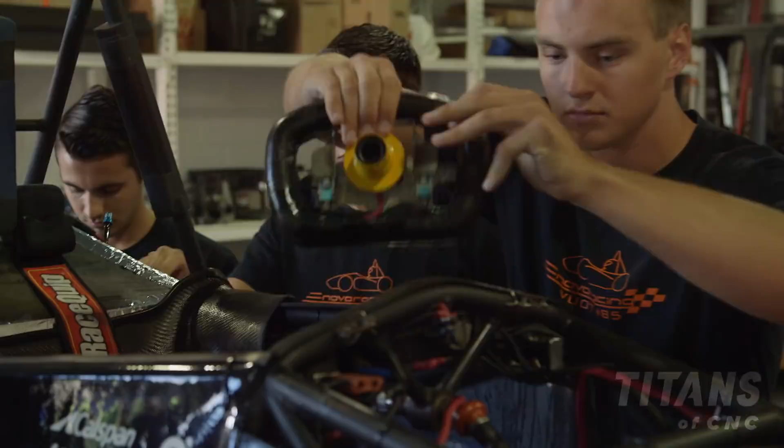Our philosophy is to engage students and cultivate an environment of critical thinkers. Most of our members come in, don't know the difference between a wrench and a screwdriver. At the end, they're engineering wireless telemetry systems, designing 3D printed intakes, fully designing suspensions, and even here just with this upright, that's Ben's part designed. We want members to come in as students and leave as engineers.

We were very fortunate in that our first team members were really dedicated car guys, and they knew how to get us a good foundation. Classroom will teach you how to be a good academic, but Formula will teach you how to be an engineer.

Woohoo, this is gonna be awesome! Excellent job, man, congratulations guys. You guys ready? Yeah, I'm ready. Are you ready? 1 year of hard work, of design, fabrication. We're ready. Building it right here in America, Pennsylvania. Is it gonna start? It's gonna start, it's ready to go. All right, let's do this.

This episode is one of my favorites out of all that we've shot because it's about the younger generation rising up.

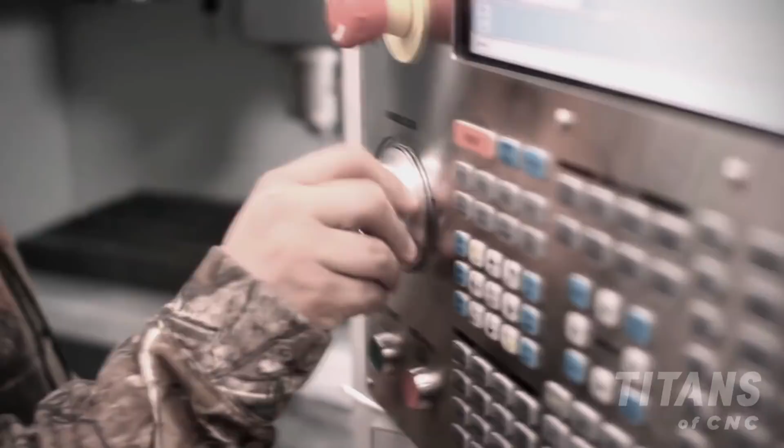We looked at my boys, we looked at the students at Villanova University, at Danville Community College. We looked at a father and son who started a business, the whole family came in, and now it's a global medical supplier. The youth, they don't believe in the impossible. They believe in challenging what others say is impossible, finding their niche and finding their way around the wall to move forward. I, for one, am proud of our youth, and this episode proves what they're capable of.

Really sorry, Mike actually doesn't work here anymore. I know his dad runs the show. Can I talk to his dad?